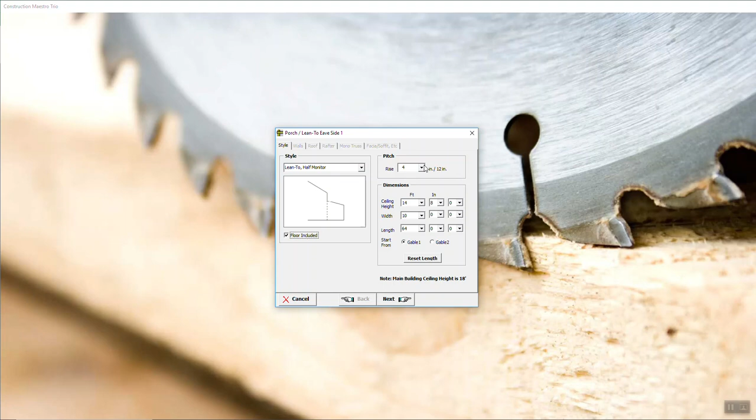If I wanted a floor included in that lean-to, I would check this box here. That's for people who have the contractor labor module. So when we draw it, we don't draw it as looking like dirt, we draw it as concrete. And then the pitch is here and the dimensions.

So if I set this, let's say I increase this to 17, notice how this turns red. It's warning you that it doesn't work. So when you drop it down, if it's out of the red zone, you know that this particular section is below the roof line on the main building.

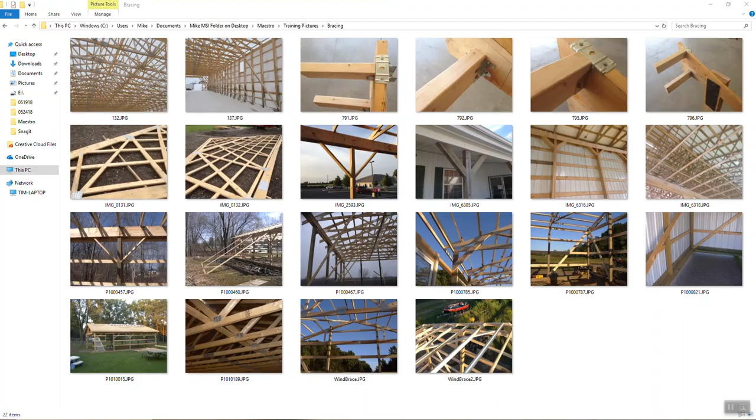So if you're doing a dual pitch and you want this to go partial way down, we'll let you do it with this style. All you have to do is bring that bottom up just about to the top. What you'll find is there are transitions that do look nice when it comes to lean-tos, and I'm going to go down here and see if I can find it right now.

There are some nice pictures I can show you of how they get around this. Let me see here, porch. Is it in here where I can find that porch? No, it is not. Let me look under lean-tos here. There we go. When I go into lean-tos, I found the picture right here, I'm going to pull this up.

Now look and see what they did: they kept it right down below the other line instead of trying to bring it up to the eave line. If you were dropped down below the eave line, you could get those two to line up, but when it's hinging at the eave line, it doesn't look too pretty. Here's a case where this particular user dropped hers down and even got below the soffit, which is a great way to go, saving you a lot of trouble when it comes to leaks.

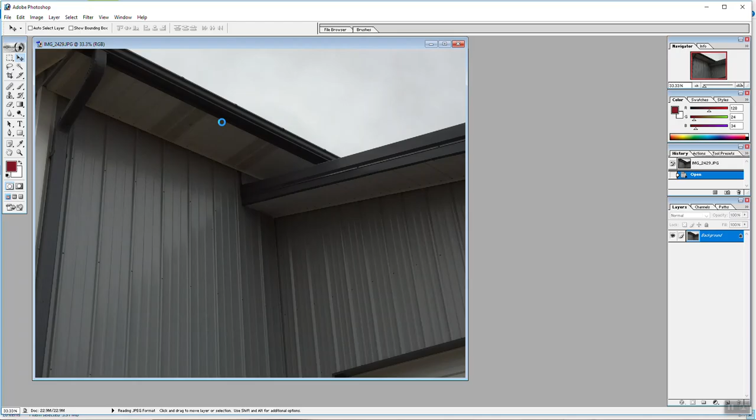And then here is a dual pitch where they hinged at the eave line. Notice they come together right here like this, but there's not much of a pitch change on this particular building. But if you went partial way down, it's an issue here.

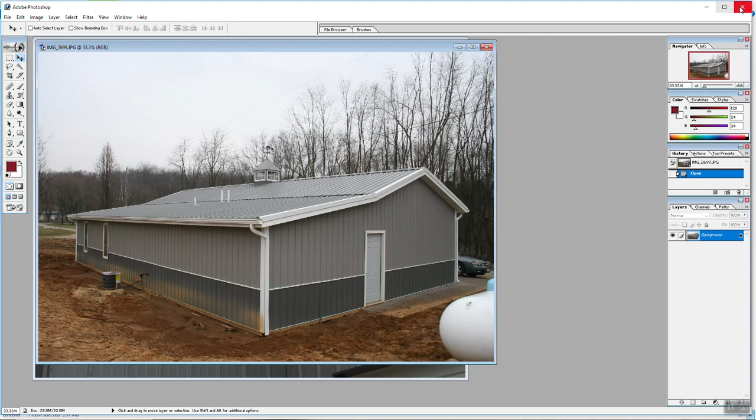Okay, enough said on those. I just wanted to show you the difference between those. We'll go back to our estimate, then where you're starting from.

So we need to know which corner you're going to snap from, so to speak, and then how long you're going to go - the length and the width. And this is showing you the ceiling height based on which one you selected.

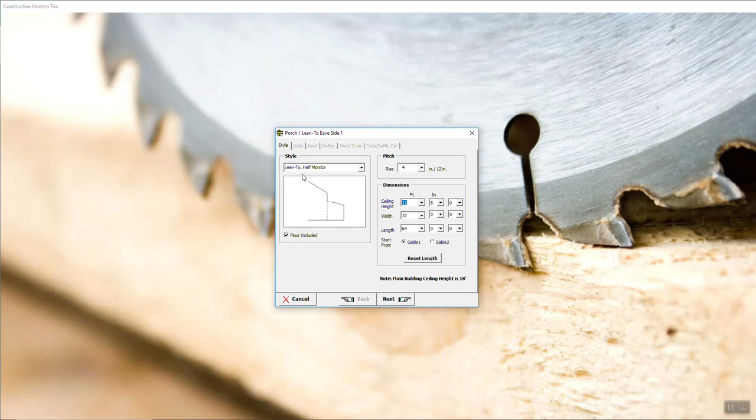When you hit next, we're going to ask you what you want to use for poles, what you want to use for the top girt, and is there an inside wall in this enclosed lean? If so, would you like the material calculated for metal and wall girts? If you check that box, you're going to get that.

When you hit next, overhangs - are we using rafters or mono trusses? If we're using rafters, you just come in here and select all of these. After you've selected them, you're in business. You'll have your porch or your lean, and you could do that all the way around the building.

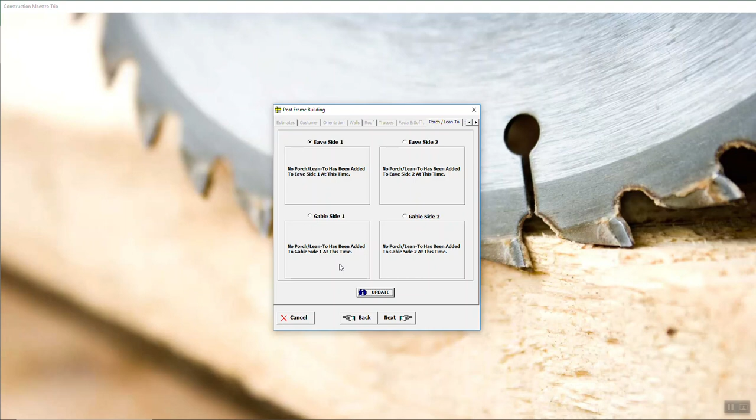We do not draw hip right now. So you could do a gable or an end wall lean, or a porch, and it could go all the way around the building. We're just lacking that corner hip.

Next, this is for interior material. It's very self-explanatory - everything you've seen so far works the same. When you hit interior, you've got your skirt board, your wall girts, your insulation in the walls, your wall material layers, your floor material layers, where you want to start your siding on the inside of the building, and your interior ceiling - the insulation that'll be in the ceiling purlins, and the ceiling material layers.

All right, then also you've got an option for radiant heat in the floor, and an option for miscellaneous items.

Just what I wanted to show you with the miscellaneous items is right here. A lot of people think this is the only category available. When you go into product setup, everything you see in here is called the category 'other products,' which is miscellaneous items. You can scroll through this to see what you're looking for. Each one of these does not have a home in Construction Maestro, so to speak, so they're just things thrown into the miscellaneous items bin, and then you can select what quantities you want - you're manually doing it at that point.

But just know that there are other categories. You could click on overhead doors, you could click on plywood - you can go to all these different ones and say, hey, 7/16 plywood, I want to add 5 extra sheets, because the customer wants them. Then just click this button here and that will add those sheets of OSB to the estimate.

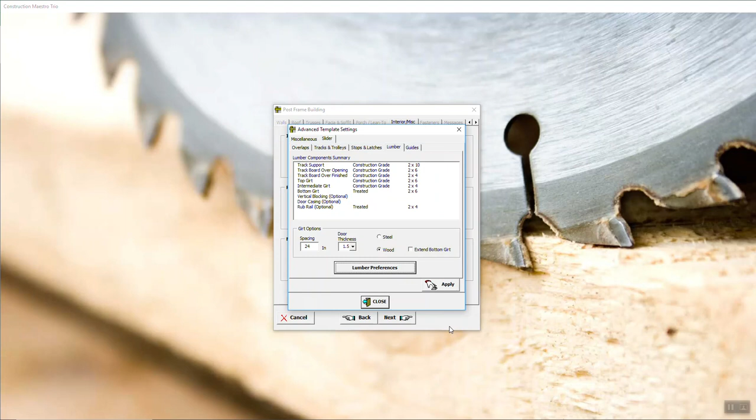Then for guides, we have a stay roller. It applies if you use a guide rail, you would choose one of these. It's pretty simple, just go in and answer the questions and move forward from there.

Now we're at the fasteners. Any component that needs to be fastened is going to show up here. If you look at the top, you'll see these are the components, and down at the bottom are the available fasteners and product setup for that component. When you click on these, notice how they change. On the skirt board, not sure why, but somebody has associated metal to wood screws with a skirt board—unrealistic. You go into product setup, find those products, and uncheck using them for a skirt board.

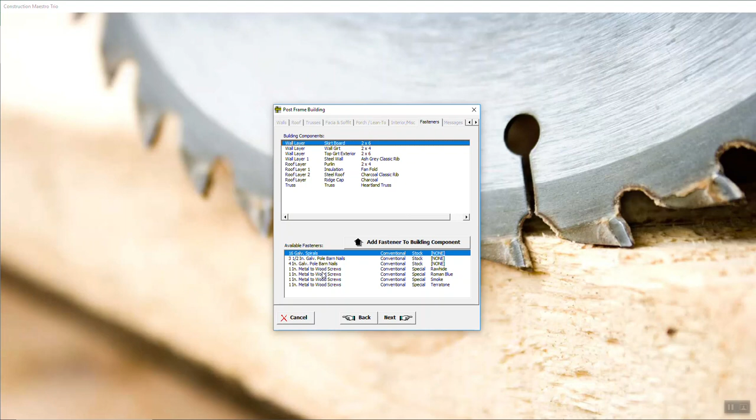In this case, we're going to use 3.5-inch galvanized pole barn spikes. When you click the button here, notice it automatically increments down to the next, but it adds it to the line. So for wall girts right now, we're going to add 3.5-inch pole barn spikes, click our button. Top girt, 3.5-inch pole barn spikes, click the button.

Metal siding, I want 1.5 inches. On the purlins, I'm going to use 5.5. For the insulation, we're going to use 1-inch cap nails. The metal, we're going to do 1.5 there as well. Our ridge cap, we're going to use 2-inch. And we're just going to do bolts, 9-inch carriage bolts, to bolt our truss to the post.

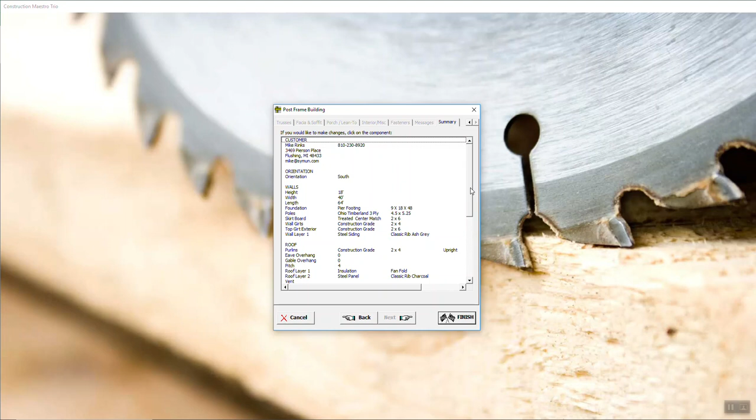We hit next. The message center just tells us if there's any conflicts it sees. In this case, there are none. We hit next, and this is just a general summary of everything that we picked. Okay, finish.

And when you get here, it'll go in and the progress bar will do its magic, and it'll come up to the gable end of a building. At this point, we have concluded or added our estimate. Right now it's chugging along here pretty hard because of used up RAM from the video. Notice it takes you to the side of a building.

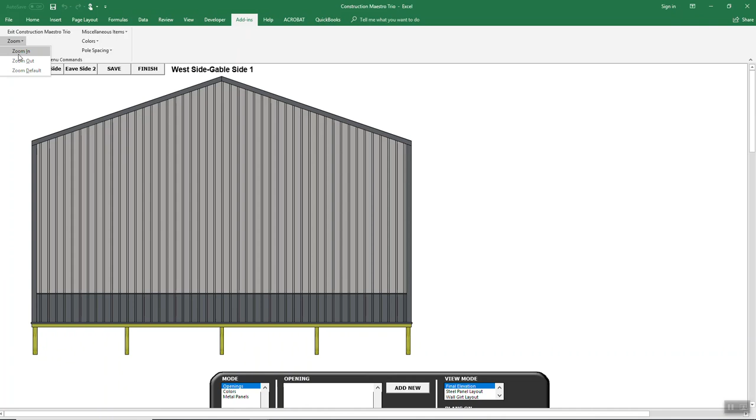Now, notice we're using Excel. We draw right on top of the grid in Excel. If I wanted to see more of this console, just go to zoom here and zoom out. There you go. Now, if I got lost, notice these icons here in the ribbon—they have nothing to do with Construction Maestro, it's all Excel stuff. There's really nothing you can do on this. Just remember that Maestro is in the add-ins tab. See that? The add-ins tab.

So if you're a 2007 or greater Microsoft Office user, you're going to see a ribbon up here at the top. Just click on the add-ins, and there's the Maestro menu at that point. Okay, so I zoomed out.

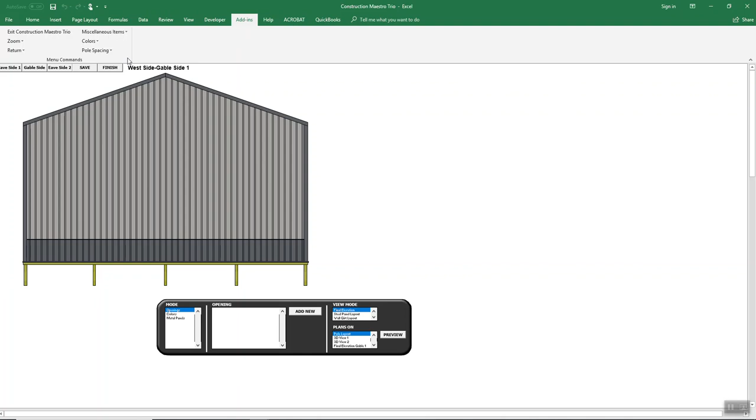I want to add an opening. So when I hit add new opening, I've got choices between service doors or man doors, whatever you want to call them, overhead doors, sliding doors, windows, openings, and open wall. Open wall just means turn off the whole side except for the gable end. So if you're going to do a pavilion, you could open up every wall on every side and you get yourself a pavilion.

Now, we're going to choose a service door. Service doors can be added two different ways: one is with 2x framing instead of post beside the door, and the other is to put post on either side of the door. Now, if you put post on either side of the door, those posts are going to move every time you move the door. I'll show you.

So I'm going to choose a 3/0 9-lite right hand. We're going to put it on the right hand side of the building. I'm going to grab my lock set—I just want one. I hit next. I'm going to use the same thing we're using for the intermediates, 3-ply columns.

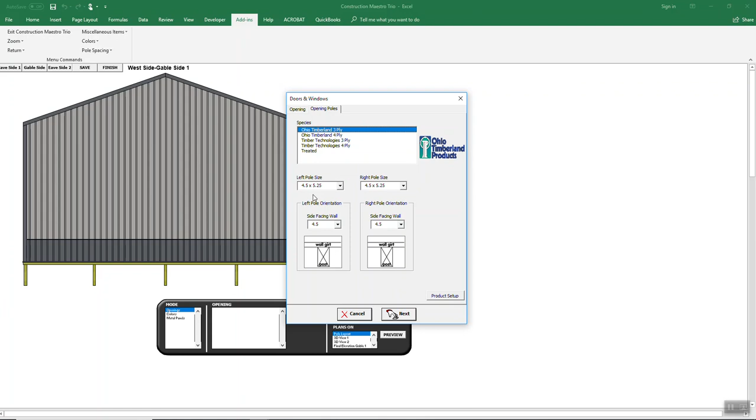Next, update. Now when I hit update, it's going to take that door and move it right to the center. Now when you hold the left clicker down, anywhere between the button and the arrow, you hold it down and notice how it moves. It's changing the post layout as it moves, because the posts on a service door are included with the layout of how things are set up.

So I'm going to bump up this door to the corner pole. Okay, so it just removes one of the posts. Now it looks like it's cut off, but it's not. It's just a white text box there showing the dimensions of where that door is.

So if you want to position that specifically in one place, you could hit position from the building's right side. I want it 2 foot from the corner, update. And now you've got 2 foot from the corner. So you can also do that.

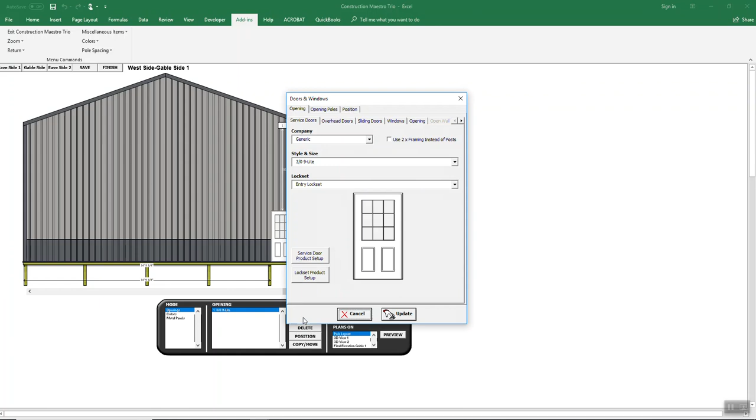Another way you can do this is instead of using posts, which will affect your post layout, you choose 2x framing. Now it's using 2x framing that does not go down into the ground, and when you move it, it doesn't affect your post layout. So those are your options. I'm gonna grab that button and slide it down right there and let go of it. And that's the way we're gonna have it for this drawing.

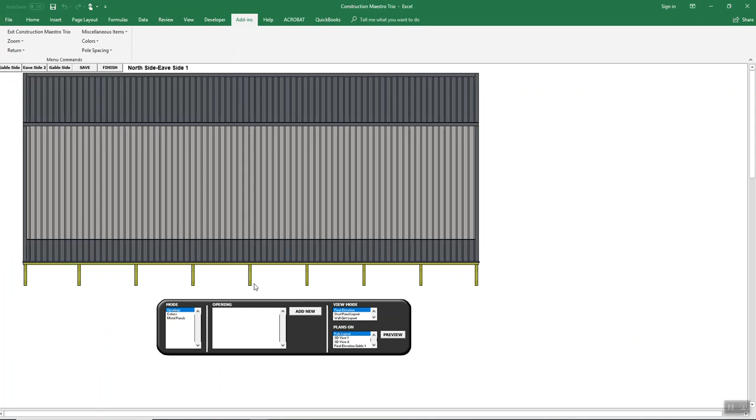I'm gonna jump over here to Eave 1. I'm gonna zoom out, add another opening, and let's put a window in. So I choose what company I want, which is just generic. I'm going to put a 4040 slider in, hit next.

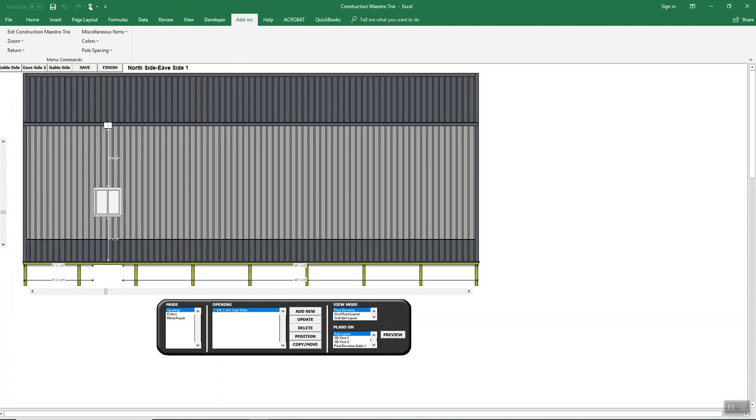You can position the opening where you want it, vertically and horizontally. I'm just going to pop it in. When I pop it in, I can move it now where I want it, and go up and down with the scroll bar positioned over here on the left. When you get the window where you want it, I'm going to move it up just a hair above the wainscot.

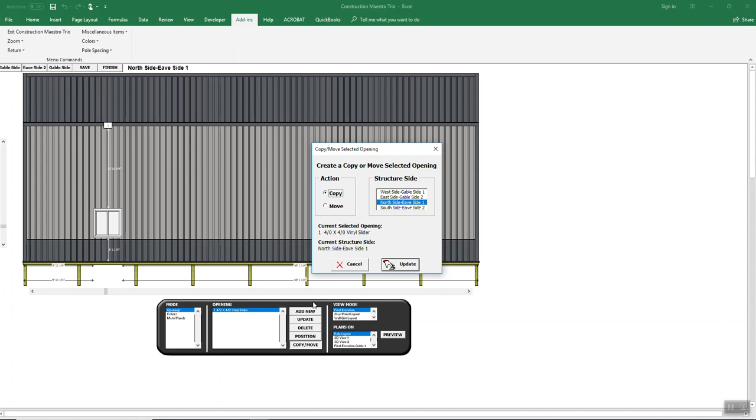I can now click on that window and hit copy. Notice up here, look at the door number, opening number. It's opening number 1. You'll notice you see it right here, opening number 1. So we're going to go in and hit update. And it just popped another opening in. If you notice, we've got 2 windows in here now.

If I just click on that window, which is number 2, I'm going to slide that down right here. It's just laying on top of the other window. So I can move that down where I want it. All right, so we'll say great, I'm done with that side.

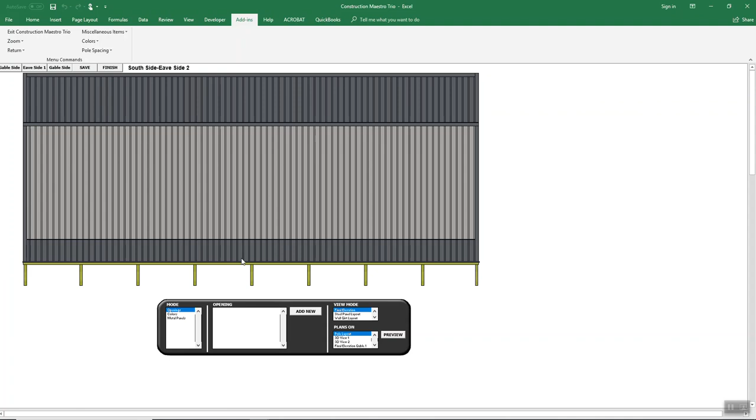I'm going to go to Eave 2. I'm going to zoom out, and I'm going to put a header up here because I'm going to put a door opening in. I'm going to add an overhead door, and I'll do a 12 by 12.

I'm going to use the same poles as I used on the rest of the building. And then down here, I'm just going to choose a non-bearing header. This one's a pole barn header. It says 2x6 outside, 2x12 inside. I do need a header that carries a 700 pounds per linear foot capacity.

Now, notice up here we have an advanced tab. Down here at the bottom, that's the header over top of the door itself. So if we look at the pictures here and I go down to headers, I will show you what I'm talking about. I got some specially ready to go here. Okay, here we go. All right, let's do this.

Let's look at extra large icons, okay. Notice this header right here. That is a 2x6 outside, 2x12 inside. Now, if you looked at it from behind, this particular header is flush to the post because I have it inset.

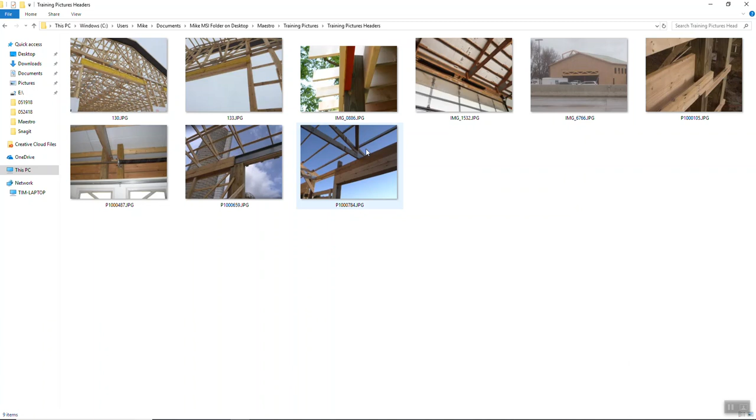So I don't have to pack out the back side of that opening to fill the void. Now what do I mean by that? Well, if we look at this header, look what we've got here. If I put an overhead door in right now, notice I've got a void right here where my mouse is.

I would pack out the back side of this with a 2x. So what I'm saying is, just watch the dotted line here. I would be adding or packing in another 2x4 right there.

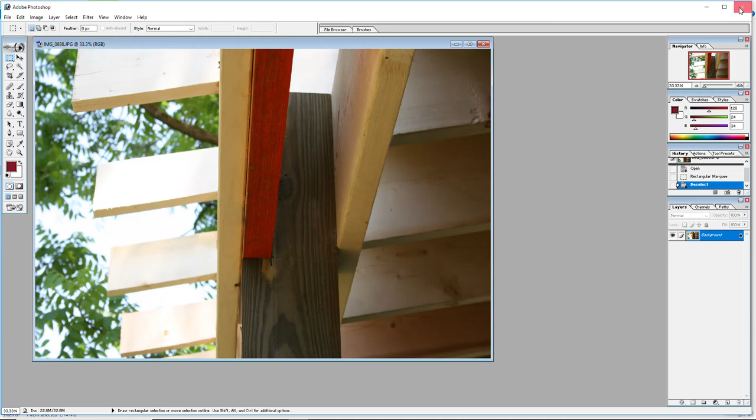In the case of the picture I just showed you, I had my header inset, so the header was just like this one, inset on the inside of the post. I'm just showing you these headers so we can get a grasp of what we're doing here.

The header above the door, I'm choosing a non-bearing 2x6 outside, 2x12 inside. I'm going to continue because I'm only going 12 foot high. So what's going to happen to the area above the door? Do I want door jamb? No, thank you. I'm going to use overhead door trim.

I think I'll pack out the back side of my door with back jamb. That has to do with packing out the back side like we talked about. Then I hit next, weather stripping. We're going to do white weather strip next, and position the opening.

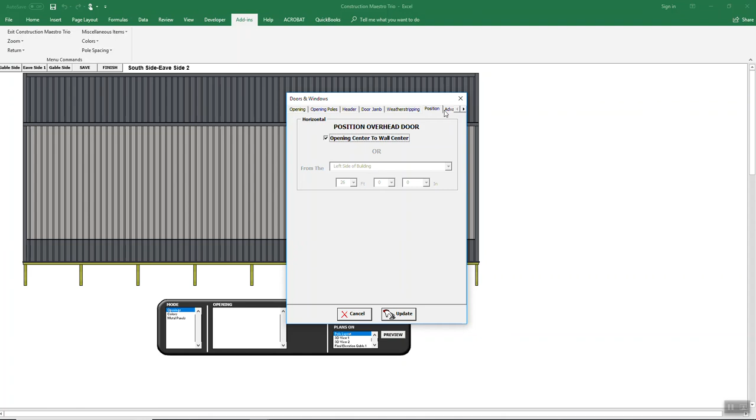I'm just going to center it. Then notice though that we have this advanced tab. If you hit update and you don't go into the advanced tab, there was nothing put in the advanced. So just remember you got to click on the advanced tab yourself.

What this advanced tab does is it shows you right now what you have up there for your top girt above the door opening at the roof line. I want to replace that one with LVL.

So I'm going to say LVL, 11 7/8. I'm going to do extreme. Let's go 14. Now just know when I update this, I have an LVL inside and out.

It's a double, one inside, one out, just like a truss carrier, so to speak. It's going to be mounted to the door poles for your trusses to set on top of, and there will also be a plug pole below. So just a heads up on the advanced tab.

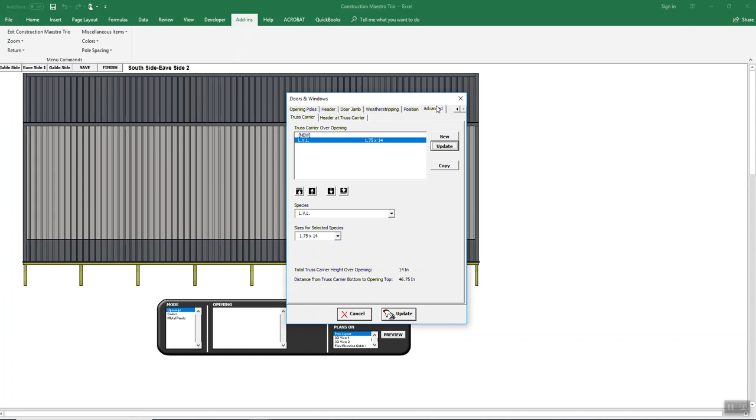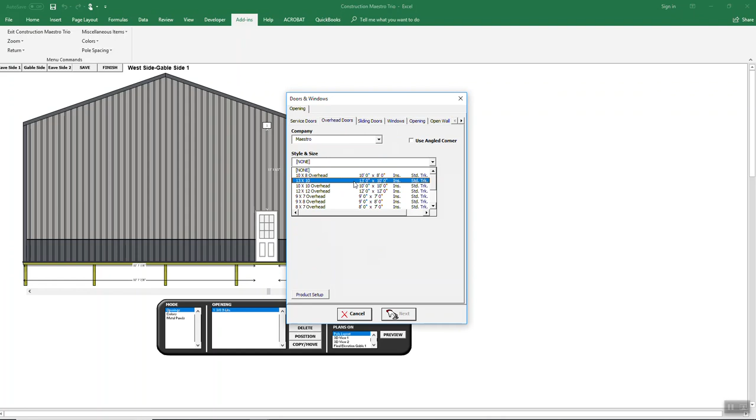So we've drawn some openings. I'm going to put one more opening here on the gable line here. I'm going to add new. Let's do an overhead door. Let's do a 13 by 10. I'm going to use a non-bearing header above it.

This one I'm not going to pack out the back side, just so I can show you when we do the drawings what it looks like. I hit update and we're good to go. Now we'll say everything's done, we got all the options where we want all the openings where we want them.

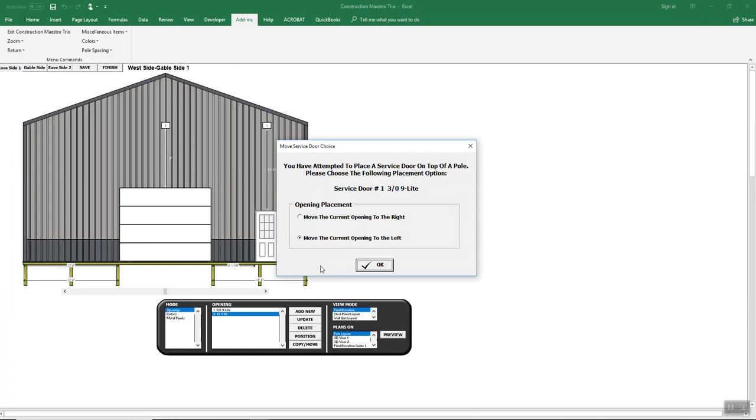It's just telling me, hey, we got to move a door because I was on top of that post. So let's move that door. Whoops, I'm moving the wrong one. I'm going to position that opening, update, center that one back. I'm going to click on this door opening and move it down here. There we go, now we're good.

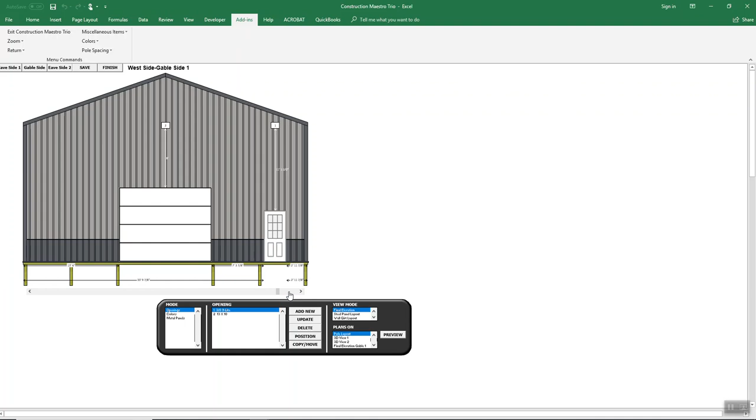We just hit finish. When you hit finish, it's going to pop up the form and ask you what do you want to do. I'm going to choose print nothing, just view.

If you have the labor module, we're going to ask you what labor configuration you want to use. I'll choose default, and I want it to automatically come up to the quotation page, and I am using retail as my price category.

I want to include the quantities on the material list, the subtotals, and the grand totals. Those are automatically defaulted, you have to uncheck them to have them not show up.

Don't worry, you'll have a chance later. If you go to print that material list, those check boxes will be there again so you can remove any sub line items where you don't want to show off the price to each component. All right, we're going to end this video right here, and we're going to hit OK here.

It's going to take off and do its thing. So we're going to leave it here, and we'll start it in the next video.